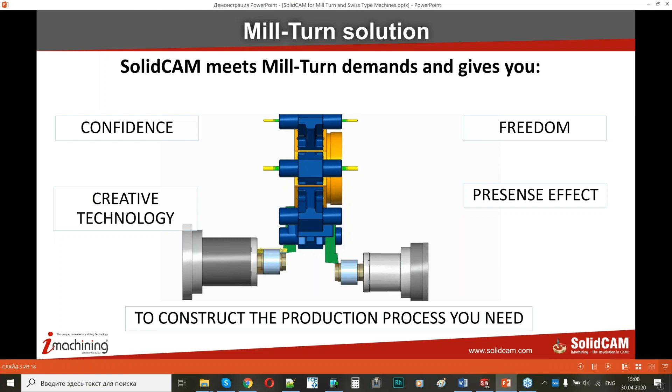Aside from machine architecture, we need confidence to achieve the best results in programming, verification of the toolpath, checking collisions, toolpath optimization, quick part running, exploiting your machine to capacity, and turnaround time. SolidCAM meets Mill-Turn demands and gives you the confidence and freedom in programming, creative technology that lets you construct the production process that you need.

One of the most advanced SolidCAM techniques is the machine preview functionality that I will show today. Machine preview means that the machine can be checked at every stage of the program process. It is not a simulation mode. It takes into account all the input data that you give to the project. Each CAM tree operation and setup has a machine preview window and machine preview functionality, getting live feedback from the machine with this function.

Another very interesting feature inside the software is tool mounting. Tool mounting is a special interface to position tools inside the machine. You can review all the tool posts that it has, and you can position your tools exactly as on a real machine. The user can get valuable information about safety, tool overhang, turret gantry, and any type of tool post loading before the real machine setup.

One more feature is MCO. MCO was designed to operate a machine outside of the cutting process. It is a critical operation for all multi-channel and multitasking machines. There are a lot of steps the user can program with MCO operations. You can change your tools outside of the cutting process, move machine parts, transfer stock, clamp and unclamp fixtures, program bar feeder, coolant, air, and whatever extra functions the machine has.

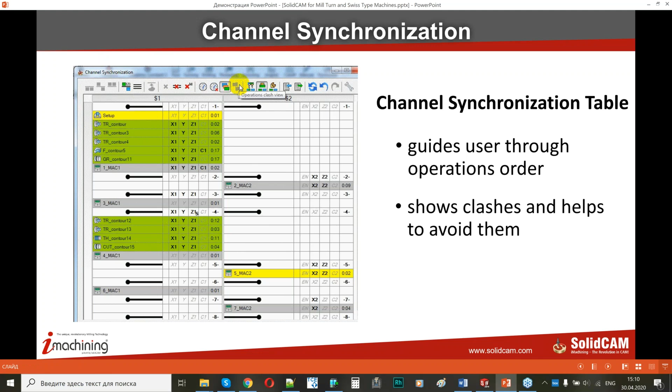Okay, this is the last slide of the first part, Mill-Turn. So in summary, SolidCAM has a flexible structure to support any amount of channels, machine functions, and cutting modes.

Okay, now I'm ready to start the project creation, and I would like to show you a CAM part creation inside SolidCAM. I will go to the SolidWorks environment, and I would like to make a quick review of the first part, which we're going to program today. We will have two of them, one for the Mill-Turn and one for the Swiss type machine. By the way, we will have 3 machines today.

Okay, our part has a 58 millimeter diameter and is 70 millimeters long. I will need both channels, main and back spindle, to program it. Also, you can see that this part has all types of common milling elements - the axial elements, radial, and even elements that will need the B-axis. By the way, my machine has a B-axis only for the back spindle, so we will leave these elements for the back spindle, and I'm going to start from this side of the part.

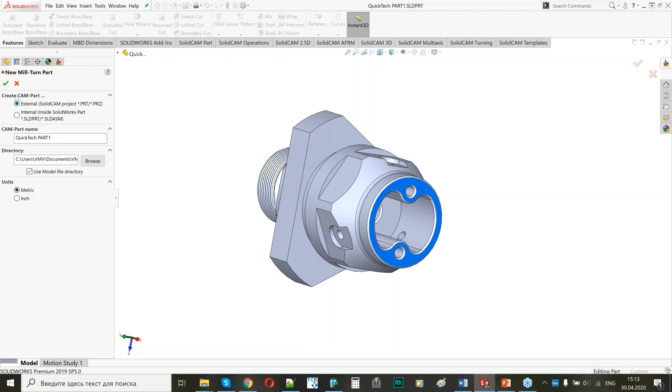And the second preparation step is similar to the steps on a workshop. I should choose the machine. As you can see, today we will use 3 machines. I will start from the QuickTech machine. Later, we will make a quick review of it. So I'll choose it.

And then I should choose where my G54 position should be, the part zero coordinate. Because of the pre-settings of the project, I have a possibility to make the number of clicks less. If I choose the position of the coordinate system for the main spindle, my system, SolidCAM, will automatically create the coordinate system for the back spindle. I just apply the position of MAC1, this is how we call the coordinate system for the main spindle, and the system will automatically create the position for the back spindle.

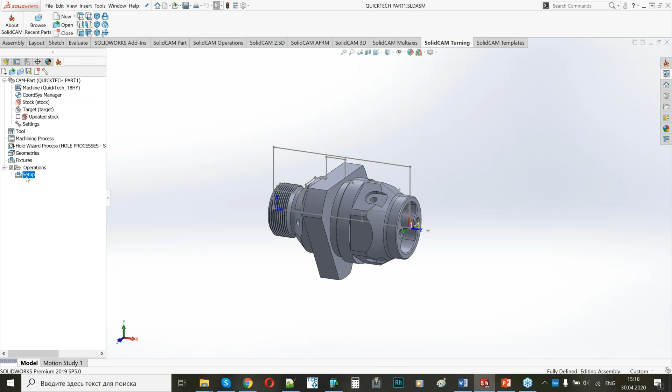The next step for me will be choosing the G54 position. For this purpose, I have a special setup window - we call it machine setup. And this is the first function that I described during the presentation, and we call it machine preview. So this is the possibility to get information about my machine and the position of the stock inside it.

So I would like to input the distance between the stock face and the face of the collet. As the part is 70 millimeters long, and I'm going to cut it from a bar, and I have elements here, I would like to put it 78 millimeters out from my collet. I can see this distance using the machine setup window. Also, I would like to add information for the machine right now about the clamping position for the back spindle, because during the cutting of this part, I would like to do the cutoff when it is clamped in both spindles with spindle synchronization function, which is supported for this machine, before parts are transferred to the second channel.

We can make a quick review of the machine before I add information for the back spindle. This is a two-channel machine. It can supply both with Mitsubishi and Fanuc CNC. The current one will use Mitsubishi.

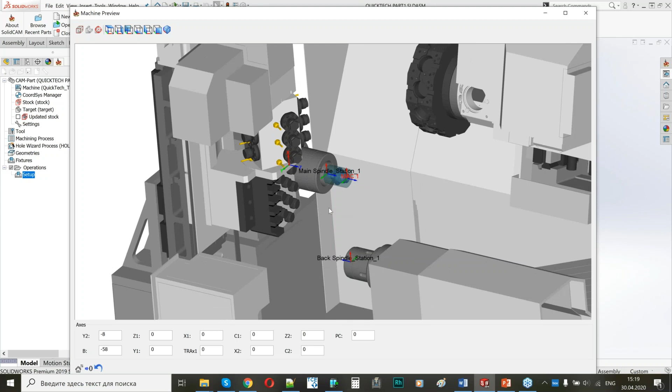My gantry is programmed in the second channel, and it can operate only on the back spindle. This is how the machine is operated. I have several axes here, linear and C axis on both spindles, and 3 rotary axes, C axis and B axis.

I will continue with positioning my stock, because the machine should know where the clamping is going to be when I do the cutoff operation. So I'll click on the position of the stock on the back spindle, apply the stock-in command, and now I can see my back spindle, and I can arrange the position of the stock inside the back spindle after the part is cut off.

This is it, I can change it. I can go back, even though the geometry is created and all operations were calculated. I can go back and change these figures, and the system will recalculate the whole project.

I will put my stock back to the main spindle, because I would like to start from the main spindle. I have my bar here and a bar feeder, and I will use it for the cycle machining. Okay, I finished with my machine setup.

Now the machine and project know where my G54 position is. Automatically, the G55 position will be applied here for the back spindle for the second program.

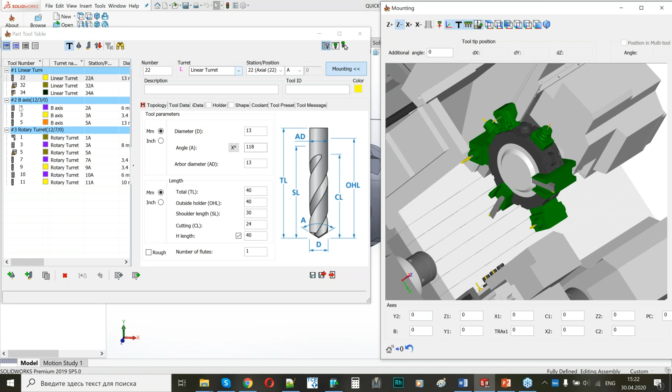And here I will apply some tools on a turret. This turret, of course, is a turret with driving tools also. I have a list of tools on a rotary turret, and I will apply several tools on a gantry.

I have tools for the turning operations. These blocks support only internal turning and drilling operations in turn mode, and this block can be positioned in B-axis. It is driving tools, and they will need a driving C-axis and milling mode on a mill-turn machine.

So here are my tools. I will save this tool table, and now I can start to program.

Now I can start to create my operations. Of course, as always, we are starting from the facing operations. I will go to turning operations. I will name my operation face on main spindle, and I need chains.

I need to input information to the project about what chains I'm going to cut. I have 2 types of geometry here: wireframe geometry - as you can see, SolidCAM automatically created a wireframe sketch based on revolution faces of the part - and also I can use a solid method, which I'm going to show you today.

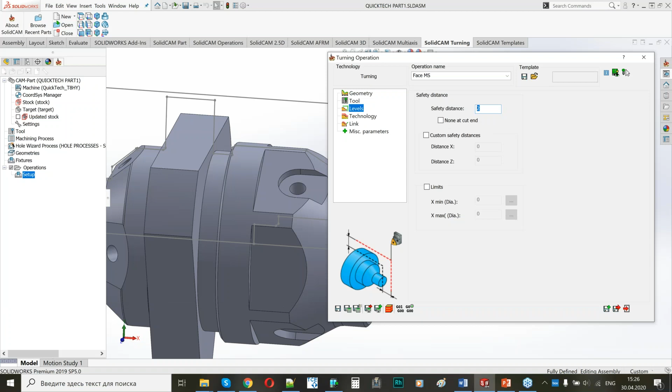I can change and apply different types of safety levels. You can play with these figures during the part creation. And that's all I need for the first facing operation.

Next operation will be OD turning operation. I will turn this part, prepare it for the milling operations. For this, I'm just making a copy of the current operation, because I will use the same tool, but I will just change the geometry.

I will choose what I'm gonna cut, all steps and all chains. This is a confusing moment, but don't worry, we have a possibility to skip this undercut, and I can choose it freely.

That's what I need. This is my chain. I will apply it. The tool is saved from the previous operation. It is still tool number 5.

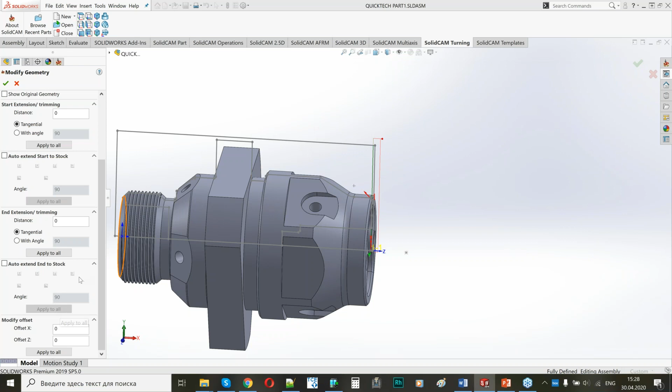...to make the cutting easier for the rest operations, which I will create later. I would like to extend my chain a little bit, for example to 2 millimeters. I will have this extension here.

Okay, now I need to check the strategy type. I would like to not perform descent motions, because I'm gonna cut this groove separately with a separate type of tool, a grooving tool. So now I can perform a calculation.

And this is my standard turning. Very nice. What else can I do? I can perform some types of links. For example, I can put the optimal from previous or whatever you like.

Because these two operations are performed with one tool, they are cut with one tool. This is why we can play with links a little bit more to achieve more optimization of the toolpaths.

The next step is the grooving operation. I would like to prepare my part before I start the milling operations, and I will apply some grooving. So I'm going back to turning operations and choose grooving type, grooving strategy type.

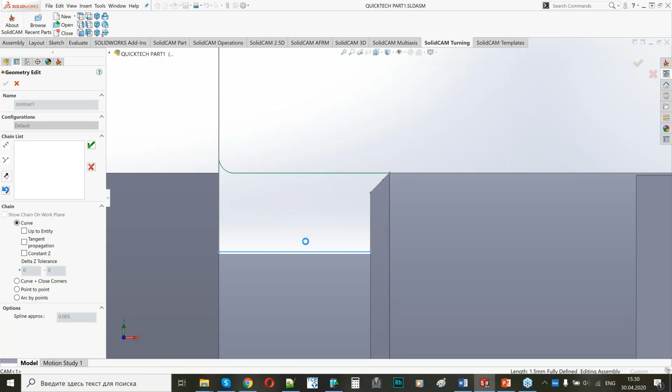And now I will apply my grooving tool here. I will choose it from the list.

And now I need to apply some type of strategy here. We have different types of strategies. It is automatically using the external grooving type. Here I can put information about the steps which I'm gonna use and the step over, so it's a distance in the direction.

Also, if I would like to leave some extra material after the rough operation for the finish operation, if my insert can perform the turning type of movement, or I should divide my groove into stages, first just roughing and then finishing, or whatever you prefer. You can have all these types of strategies inside the SolidCAM software.

Especially, I would like to draw your attention to the types of strategies for finishing. We have different methods. You can apply different types of method according to the functions of your insert. So I will use down only type of strategy, and...

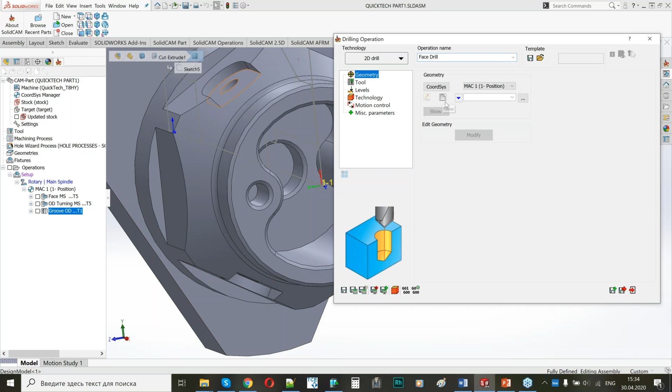So I will add a drilling operation. I will call it face drill. And now I will choose the geometry. I will choose the 0, 0 position here.

And now I can choose my tool. It will be a 10 millimeter drill. I have it here, 10 millimeter drill. And now I should tell the system about the depths of drilling. I will start from 0 level, and go till this bottom. And maybe a little bit further because I have a conical tip, and it will be easier for the machine to have it.

Type of drill cycle, you can choose whatever your machine has. Some mill-turn machines don't have a G81 cycle, and you can use G83 with one step, which will be equal to the finish position, or you can uncheck use cycle, and in this case you will get the code without cycles at all, just G0 and G1 movements code. So this is it. I will apply a one-step cycle here.

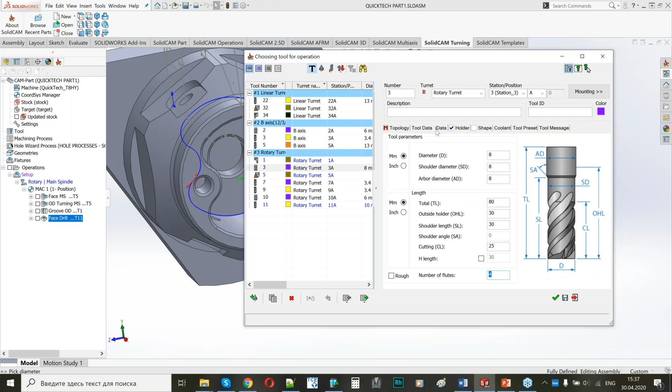Now I will choose my tool. Of course, it's a special tool for the iMachining. It has a special geometry, so I will choose it. It is 8 mm diameter, has 4 flutes, and there is a special tab which is called iData.

And I'm going to apply it on this machine. Okay, here is my levels. They look okay because this is the depth of the pocket.

Inside the technology wizard, put the level of cutting to 2 because it is not the milling machine. We have our driving unit on a turret, and it is weaker than the drive unit on a milling machine, but it can deal with mills with small diameters, for example 5, 8, 10, 11, 12. It's okay for the machine, but if you try to apply a larger diameter tool, you may have problems because the machine can be overloaded in this case.

So I will apply the second level for this part, for this geometry, and also I would like to apply some offset. I will leave some material, and cut it after the roughing operation. I forgot to name my operation as iMachining roughing face.

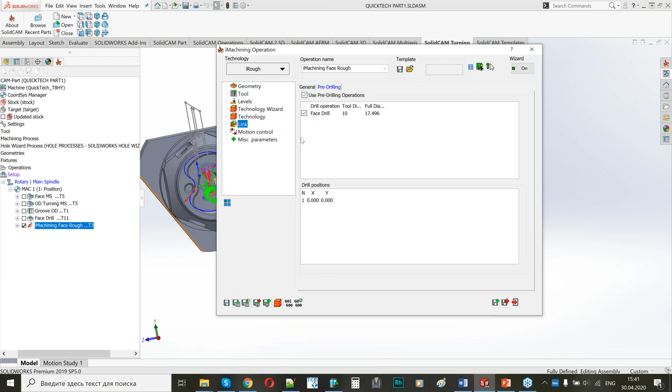My operation will use the pre-drill point. Because I had a tool with a conical part, to not damage the mill, iMachining will make some helical movements at the bottom, and only after that I will have my iMachining toolpath here.

Now I will make a copy of this operation, because I would like to perform an iMachining face finish operation, using the same geometry. I would just put it like a finish operation, using the same geometry, same tool, same levels.

Because I don't have too much material on the walls, I will increase my machining level. Also I would like to get rid of the offsets. I will untick them, so I will get the true results without any extra material here.

What else can I do? I can see the previous operation, which will be taken into account during the iMachining finish operation. So this is the operation which I had previously.

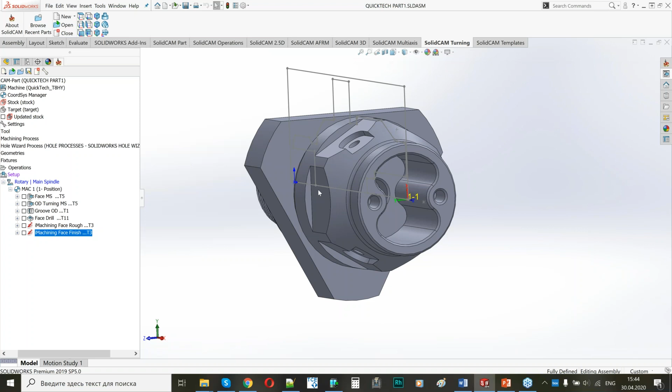I will choose the milling block again, but I will apply the drilling type. Let me check the diameter of the holes. It's 3.4. I need to check if I have the tool for this.

To choose these holes, all I need is to click on a face, and I will have the list of the holes here. I will apply that and we'll see what will happen.

Here I will choose my drill, if I have it. Yes, I have it. Let me check if it's mounted on the face. No, it's mounted radially, and this one is mounted as a face tool. I will apply it, and here I should choose the levels.

Just clicking on the model to get the result. Also I can apply some step here. This is for the G83 cycle, 2 or 3 maybe, I don't know, it depends on the tool. I will have 2 steps.

I can also apply a polar type of coordinates to rotate the part and change the Z-axis, to not move my turret in the Y direction. And here are my drilling operations. Now I would like to mill these faces.

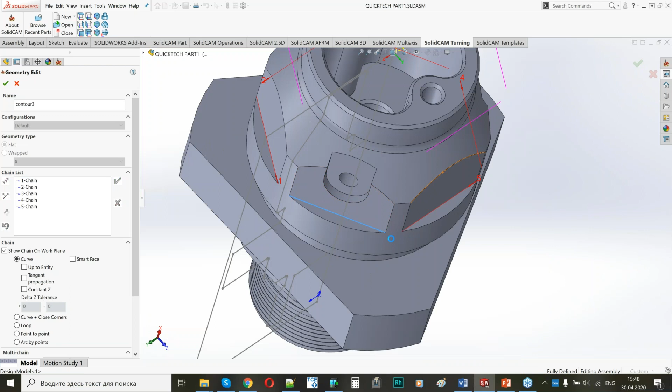Okay, my chains are ready. Now I will choose my tool, it will be an 8mm tool. Here it is. Okay, let me order it a little bit.

Now I should choose my levels. I can apply levels from 0, or, because all these areas are cut already with turning tools, I can apply it like 8mm, and here I will choose the end of the milling operation, the lower level.

Now I have to check the position of the cutter. Also I can do some extension here. This menu is similar to the turning menu. I can also apply extensions on the link page.

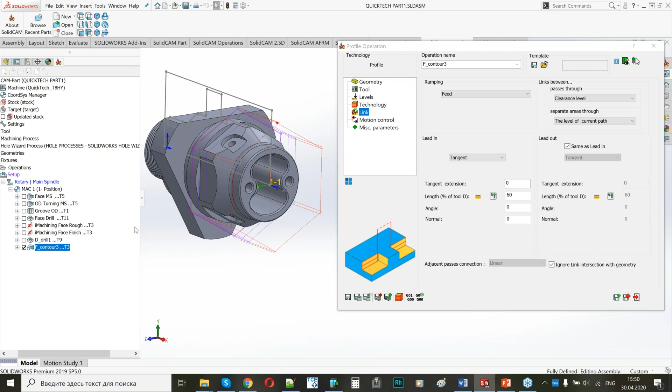So this is my toolpath, and what I can do also, I can leave my tool on the level of the current toolpath to minimize the number of retracts. And also I will give a nice name to this operation.

Okay, the next operation will be some radial milling. I would like to cut these areas, I have several here. On these areas I will show you the transformation functionality of the system, because you have three elements which are the same, will use the same tool, the same toolpaths, the same feeds and speeds. I will cut one and then make a transformation. It's like a pattern, like copy with the four axes.

So for this operation, I will apply a profile type of strategy tool. I will call it radial profile, and I will need to orient, to apply some orientation for my cutter, because I would like to apply some radial tools. For this purpose, I will need some additional coordinate system which will not influence the output. It doesn't mean that the system will create one more G55, G54 coordinate system. No, this is an additional coordinate system only to position the axis of the tool. So now...

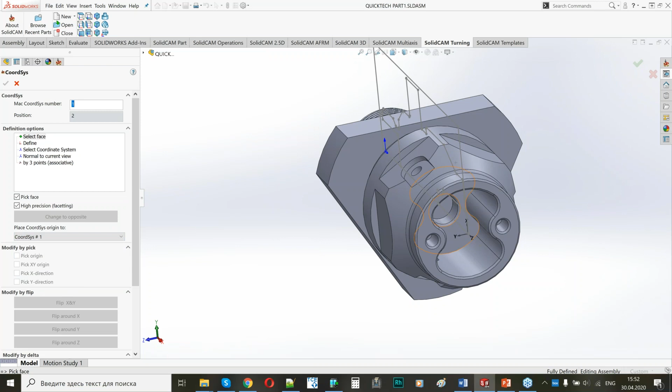I will click on the coordinate system button, and I will add one more coordinate system to my main spindle. I will choose a special function here. This function is used to position the coordinate systems. I have no idea about the real angle between the previous position and current position. I just click on a face and I will get the right direction for tool axis. So we do need to align the tool axis properly according to the surface of the part.

Apply that. And now I can choose the new geometry, new chain. It will be just the geometry of the current profile.

Okay, and now I will apply my first radial tool. It will be tool number 10, which is 6 mm diameter mill. And on the levels page, I will apply the level which is already cut on the previous operation and the current level of the chain. Also here, I should check the direction, position of the tool according to chain. It is okay now. Looks good. And now I can check what I have here.

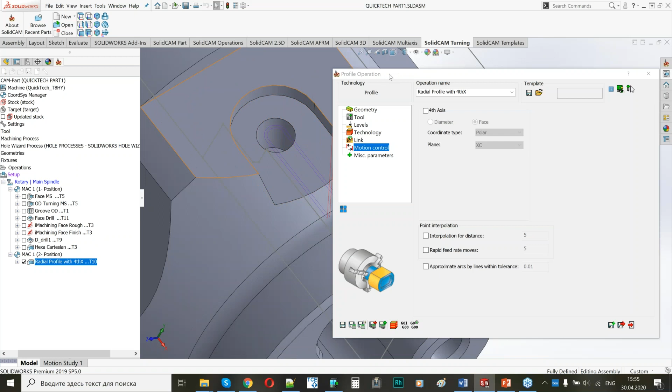I have three elements, 120 degrees between them, and I will click on the transformation button. This is my operation name, the operation which I'm going to copy, and I will use the type of copying the 4-axis. I will include the original operation. The angle will be 120, and I will insert 2 more steps here.

And I can see, before I click apply, I can see my operations, my chains here, just to check if the angle was right, if the angle was okay. I just save that. That's all I need, no more calculations here. It is calculated automatically with the system, and I have my toolpath.

So one more element which I have here is my holes. I will create them with the same manner. I will apply the milling type of operation, will apply drilling. I still have the direction of the tool as MAC 1, 2. This is the right direction which I need.

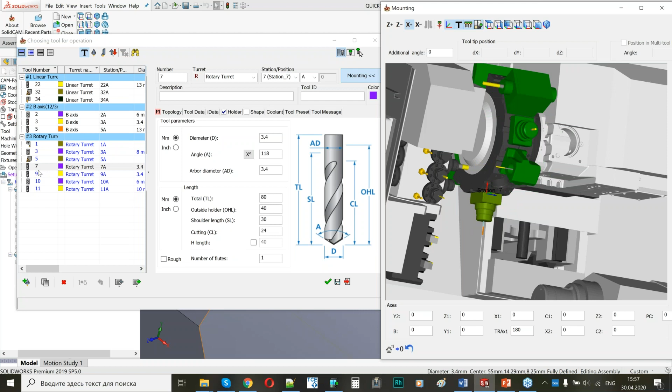Let me check again the position of my tool here. I will use the tool mounting window to check. Yes, this is what I need, because I have 2 drills with the same diameter here, and I don't remember the exact numbers, exact position in the turret. The tool mounting window really helps me with this. So I know that this tool has a radial direction.

Nice. Now I will apply my levels here. For example, I will apply a little bit further, like 2 millimeters. And what I need also is to define the drilling cycle. That's all for the first drill. I will call it radial drill.

Now I have it here, I can see it. I would like to make a transformation again for this operation: include the original, type an angle, add the number of steps. Now I can see their positions, these pink dots here.

So that's all I need for the drilling operation. What else can I do here? I can machine these surfaces. For these surfaces, I can apply the radial iMachining operation again. So I will create, let me calculate it again, go to the milling operation, to the milling iMachining operation.

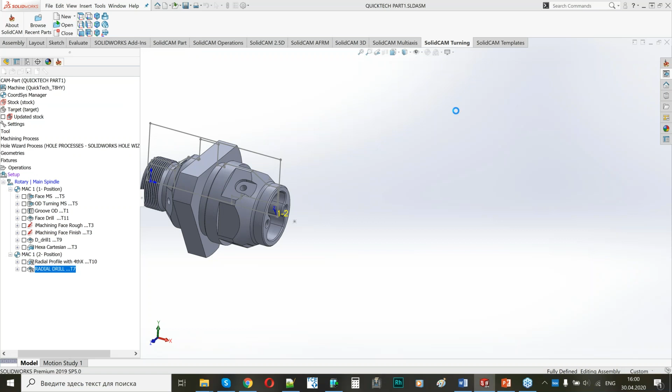Yes, I will need to change my coordinate system first, because this surface is inclined, not like this surface. So I will add one MAC 1 3 position. I will click again on my surface to find out the tool position.

And now I can create my chain. Again, I will just click on a face. I can see my chain, but I know that I can cross these edges with a mill. So I would like to mark open edges here. These edges will be marked as open.

Good. We'll just try to calculate this with the 6mm diameter tool. It's tool number 10, I will check it. Yes, it's a radial milling tool. I can use it.

Also, I need to care about my levels. Here I have the first level, which will be the already cut turning level, and the level of the chain. Now I will try again to calculate it with the second level and what I can have with my tool technology. I think I will try to calculate it.

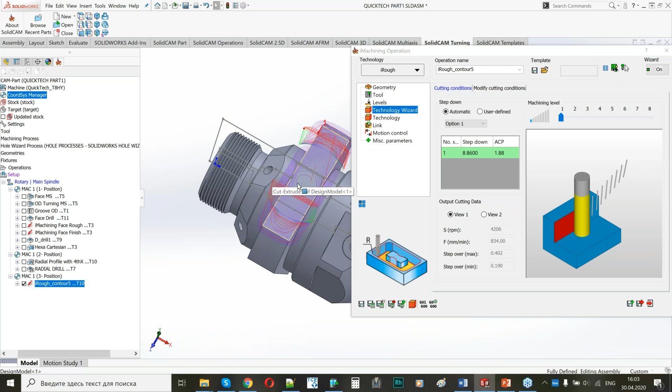Nice, this is my iMachining operation. But I don't like it, it goes further. I need to check my chain here.

Let me check it again, and I will mark my open edges. Okay, just leave it like this.

Now I would like to make a transformation here again. I have the 3 edges, and I will include the original one and make 2 more steps. Apply that.

Okay, so now it is time to perform some part transfer and preparation for the part transfer. For such type of machines, let me open my machine. This is my machine, and what I have here.

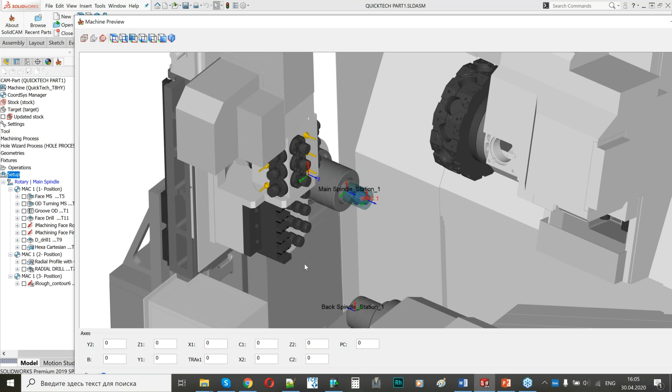After that, I will take my turret, call the tool for the cutoff, tool number 1 I think. Then I will perform the cutoff, and the back spindle should go to its home position by Z direction, and then it should go to my gantry to perform the operations on the back spindle.

I would like to mention that all these operations should be divided on different channels, because I can operate with the turret only in the first channel, and with the back spindle only in the second channel. This is why I will need several additional machine control operations. So this will be the best example of why we need MCO operations and how we can deal with them. Let me show you first the interface of the machine control operations.

I have, after milling and turning operations, here the machine control operation. With this interface, I can choose any device of the machine. For example, I can choose a rotary turret, and I can see all commands which are available for the rotary turret.

Also, it is strongly recommended to use machine preview during all these operations. So I can see my turret, and this is the position of my turret after it was retracted after the last operation. Here, for example, I can perform some movement. I would like my turret to go, let me make it bigger, to go to X, for example, home position. So this is the home position.

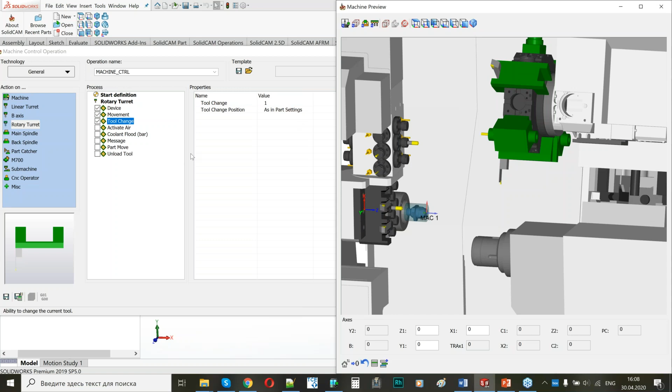This is one side. This is the basic feature, basic tools that we are using to control the machine, control the devices. But if you deal with such type of machines, there are certain rules, a certain routine, for example, the cutoff and part transfer process. And to not create all this process from scratch each time you have a new part, we have the

function which is called MCO cycles. So we have all these stages, all these motions, issues already added for the certain machine. And today we will see a lot of different types of MCOs, and we are creating MCO for the certain post processor. These commands are connected with the machine ID file, and if you transfer the part from one machine to another, you have to care about MCO operations because they will differ, as these processes differ on different machines.

This window was just for demonstration, but I'm gonna use the MCO cycles. So again, I will take machine control operation, but here I have a list of predefined sequence of cycles, and all I need to do is just input the parameters that may be changing during this process. For example, the first MCO operation will be on the first channel.

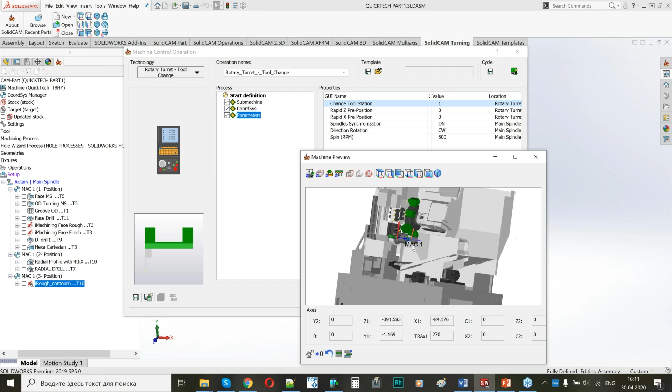Also, as you can see on this machine, if you're using it as an operator, and I click on the front view, you can see that this gantry completely closes the view of the turret, and you have to move inside the machine to see what's going on there. This is true for this machine, which is why we recommend using the machine simulation and 3D of the machine. It's a good example of why we need the 3D machine view, because we don't need to go into the machine and put our head inside it.

You can use only the machine preview window for this purpose. So I have the preposition for the tools. I will put my tool to the safety position, or for example, I can set some figures here, and for example, I would like to move my cutoff tool only in the X direction. I don't want to move it in the Z direction, for example.

Here I should decide if I will use spindle synchronization. It is always recommended for this machine to use it. And this is the direction of rotation during the spindle synchronization. There is a special technique for this machine: on the first step you apply a lower speed, and during the cutoff, you apply the cutoff speed.

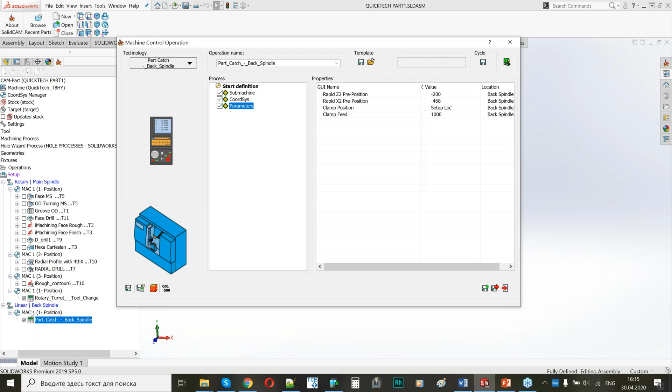So what I have here, let's take a look. I will just calculate that. So here I have information about the submachine, and this is also information about the apply channel.

I will preposition my z-axis, so this is like the safety position for the z-axis. Then I will preposition my x-axis, so the default position for the x-axis is the position near the gantry. It should go to the main spindle to make a part transfer. Then I will go and apply a setup location, which I added previously in the setup window.

I will also input the clamping feed. During this process, I'm not going to use millimeter per revolution, I should use millimeter per minute, so G98.

We have this information inside the post processor, and you can input the speed of back spindle movement during the synchronization. I will remind you that this process proceeds during the rotation of main and sub spindle - they rotate together with the speed which we added at the previous operation. So I will apply this.

And now, after the back spindle was clamped, I can apply a cutoff operation. I will add turning operation, and we have a cutoff operation here. I will name it as cutoff.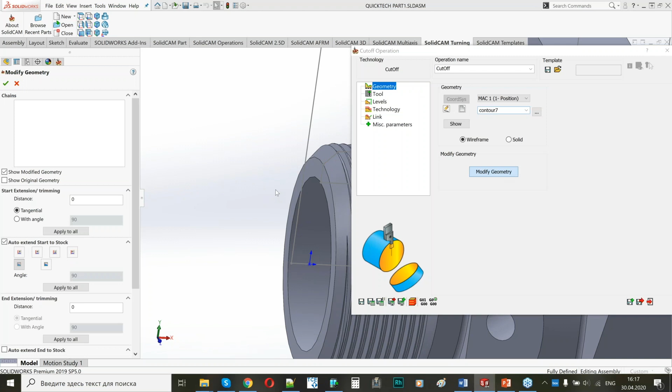Here I can leave some allowance, for example for the turning operation. I should choose my geometry here. I will choose this one. We'll change the chain direction. Now I will modify my geometry a little bit to have the cutoff operation from the bar diameter until the bar end.

Now I will again choose the cutoff tool, tool number 1. I will leave my levels, and I should put some offset here - this is offset for the back spindle facing operation. Here it is recommended to put only the X value, so I will put some safety value, and this will be the same value for retract.

So this is my cutoff operation. Now I need to take the stock and put it with the back spindle to the gantry. So now I should perform the movement of the back spindle, and for this purpose I will go to MCO cycle again, and choose a part transfer back spindle operation.

I have the message again because my channel will be changed. The back spindle is programmed in the second channel, and I don't need parameters here because it is known that the back spindle will go to its Z home position, Z2 home position, and X2 home position. I will just calculate that. It is supported with a certain code, and the code will be outputted to the program after the end.

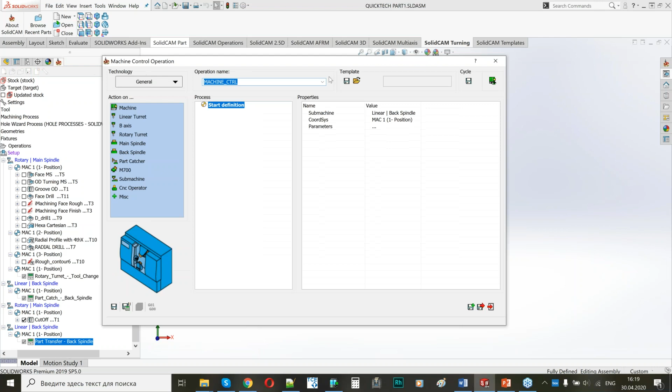The next step here is to prepare my turret. For example, I don't want to leave my turret with this tool, I would like to move it somewhere, for safety reasons. We have this cycle, you can apply it or not apply it - it depends on the workflow you prefer on the machine, because all these menus are completely customizable.

So I will apply rotary turret tool change end, and I can choose the next tool, for example, which will be used for the first operation on the main spindle again when I will launch the cycle. It may be T5, for example, or I can leave the cutoff tool here.

Okay, now I would like to add operations for the back spindle. I'm ready to do this because I have my stock inside the back spindle. So I will go first, of course, again to facing operation. I will name it as face turning on the back spindle.

And here I will apply MAC 2 coordinate system. I will choose the geometry - this coordinate system became active, I can see it here. And I would like to do just a simple turning from upper level to down, modify geometry again, because I have laws here.

Extend it. And now I have a possibility to choose my tool - this will be the tool on the gantry.

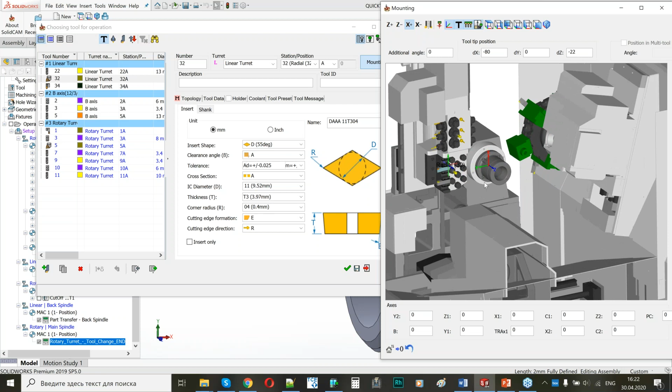Even this coordinate system for the turret is rotated. This is why we need powerful tools inside SolidCAM to deal with these machines. But we can do this easily because of the features we have here: machine ID, post-processor, and machine file, 3D of machine. We can do this, and we do this.

So I choose the tool, my tool. I can leave these levels and I will leave this geometry as finish only. And what I can do, I think I should change my approach because now I will use the right side, I used left at the previous. Okay, this is my facing operation. If I don't like it, for example, I can do it with X direction only. In some cases it is better to use just Z direction. No, not good idea. Okay.

I should also change the setup settings because I forgot to put MAC 2 coordinate system here. And from the right. Okay. I will delete it and try again.

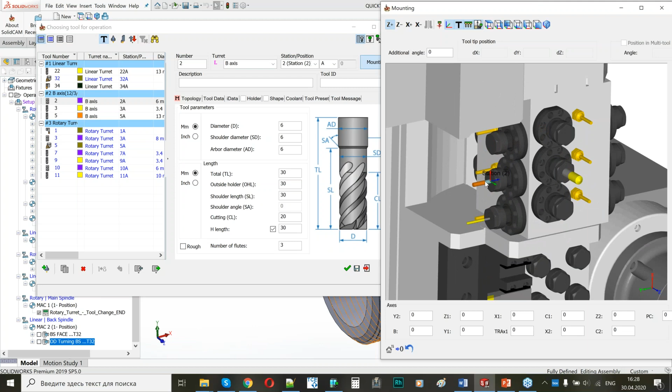Here it is. I'm going to rotate this station to the part. And I will choose my levels, for example from here to here. We'll check that. And I will use technology with classical spacing, equal step, and I will need to check my extensions, and I will use some angle here.

I will try this. And also I would like to use some corner radiuses for this operation. And also I will need to extend my lead-in here. So let's calculate and check what's going on here.

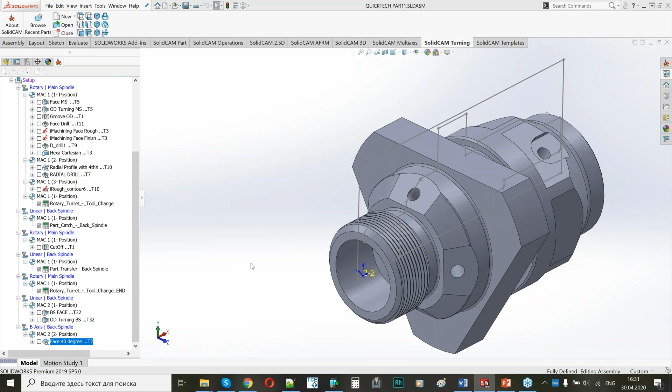Okay, and I think the last operation will be a drilling operation here. I will go again to milling operations, go into drilling. I'm going to use the MAC 2 and second position of the MAC 2 again. I will just click on the surface and the system will find the zero position here. And I will use my tool, it will be a tool on the B station. Okay, and I should check my levels here.

Nice, and here I have the functions to deal with the 5-axis machine. To understand if I will need the first or second angle pair, I will launch the machine simulation, and then I will be able to answer this question. Okay, and now I'll do the transformation again.

Okay, 90 degrees and 3 steps here. Of course I can add more operations here, but they will be done in the same manner as on a main spindle. I can also add some drilling and milling operations on the face, add threading operations, but we have one more project today.

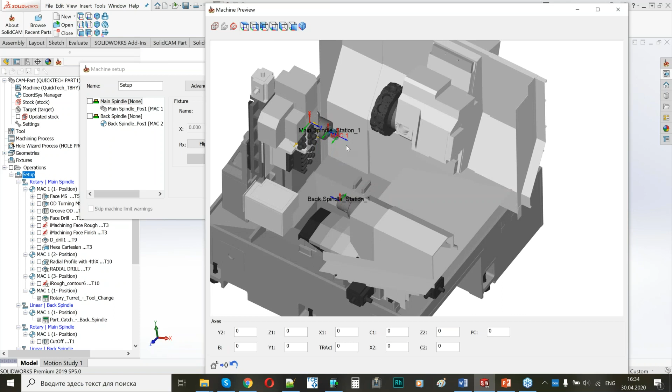Spindle goes here, catcher opens, and spindle is unclamping, and there is a pusher inside which pushes the part here, and then it goes back, and the conveyor for the parts comes on, and then you will get the ready parts out of the machine, and in this time the machine is ready to cut a new part.

So this is a very important thing. The machine should know the moment when it should drop the part.

Now let's go to the channel synchronization table. Let's take a look at this functionality. So this is the list of all operations which I added today to this project. And here we have some buttons to manage these operations, their position, and the wait marks.

These black lines mean the wait marks. So according to this, it's a special command for this machine, it's an L command. On the next machine with Fanuc, it will be an M command. And this command appears in both channels because this machine needs two programs.

So you will have two files loaded, one for the first channel and one for the second channel. And the link between these files is the wait marks. When the wait mark with a special number appears in one channel, it will wait until the same mark appears in the second channel. And we have some tools to manage all this.

For example, my favorite tool is Synchronize All Operations. And now I have the wait marks that I need. For this operation, for this machine, it's quite enough, to be honest.

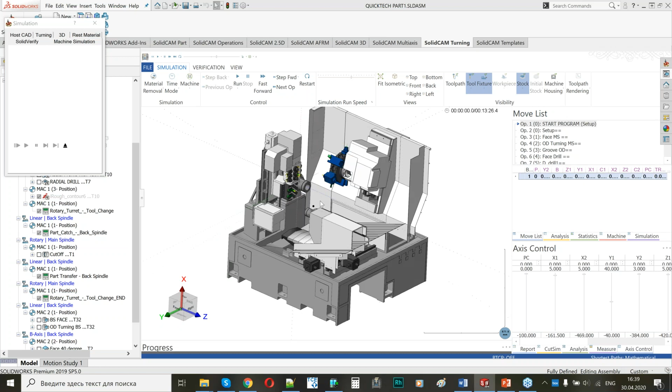It will take time to load a little bit because of online translation, but we are trying to make our STL assemblies as small as possible because of the weight of STLs and the speed of machine simulation, and its influence on the simulation. So here I have the list of my operations. I can go to any operation I'd like, and I hope the speed is okay now, maybe a little bit faster.

So this is what I have here. I'll go back to my cutoff operation and show you what's going on. This is my first MCO operation. I put my turret to the safety position and change my tool. Now I'm waiting for my back spindle here, and now I can perform the cutoff.

I can see now, for example, I would like to put my cutoff tool further, to the X position, or maybe safety home position X. And now I can have my turning operation here and other types of operations on the back spindle, make the speed lower. This is my first B-axis operation, and the angle pair looks okay.

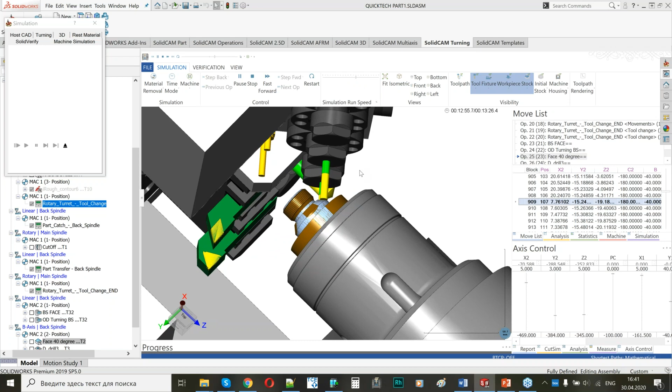This is milling. So this is how the movement is performed. We have the Y movement of the gantry, and Z, X and C movement on the back spindle. And I had my drill operation here. After the drilling was performed, I put my part to the part catcher. Okay, it looks not bad.

Now I would like to make a synchronization, so both channels will work together. I'm going back to the channel synchronization table, and I should put the command add new workpiece. That means when I cut the back face on the back spindle, a new part will come here and the cycle will start. So I will add a new workpiece, get rid of this label, and synchronize this, and also put the wait marks somewhere.

For example, I would like to synchronize milling operations or whatever I like. For this machine, it will be enough. For a Swiss type machine, maybe you will need more clicks. So I will go to simulation again, machine simulation.

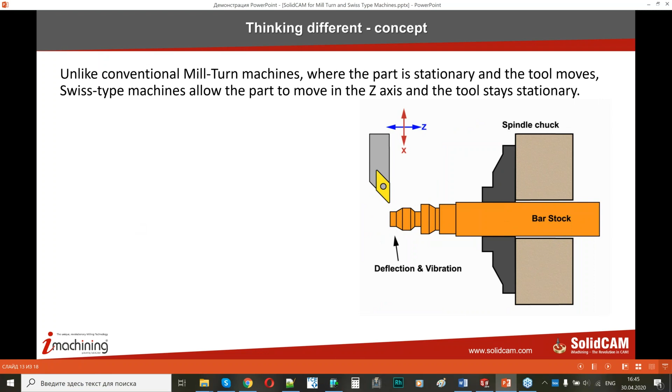So here on the screen, you can see the type of motion we have on a mill-turn machine. The bar, our stock, is fixed in a collet, in a chuck and fixture, which we have on a mill-turn machine. Because of its diameter and length, we have some vibrations and problems during the cutting of special types of parts, especially small parts. But for the Swiss type machine, this is the main difference.

We have our stock movement, so the tool is always near the fixing zone, near this device, which is called a guide bush, and we have more rigid cutting, less vibrations. But because of this, we have a special set of rules we should satisfy when dealing with these machines.

So this is the construction we may have, and this is the rigid construction for the cutoff process. Here we can have our back spindle, which is clamped, as you saw, and we are going to use this on the next project. We will clamp our part and describe this process in the machine setup window. We have our guide bush.

It is not moving. It is used only to support the bar, and there is a certain place for the tools. Tools don't move in that direction, they only move in the X and Y direction, and this is the device to clamp and move the bar stock. This is the main spindle, back spindle, and guide bush. This is the construction that we have in Swiss type machines.

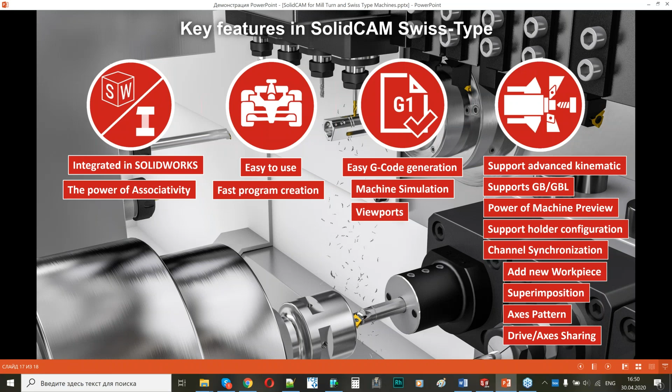This is the machine which will be used today for the last part. Now I will go back to my project.

I'm going to open a new part here. It will be a part especially for the Swiss type machine. Let me take it. So it will be the Jinfa part.

So what do we know about this part? It is small - the maximum diameter is 16 millimeters and the minimum diameter is only 5 millimeters. It is not really long, only 13 millimeters long.

For this part I'm going to use the same workflow. I will click on new mill-turn and apply the machine called Jinfa. I will show you how this machine works and the devices it consists of. I'll choose this Jinfa machine, then convert this project to the Citizen machine - the same process as during the mill-turn. I will choose the coordinate system.

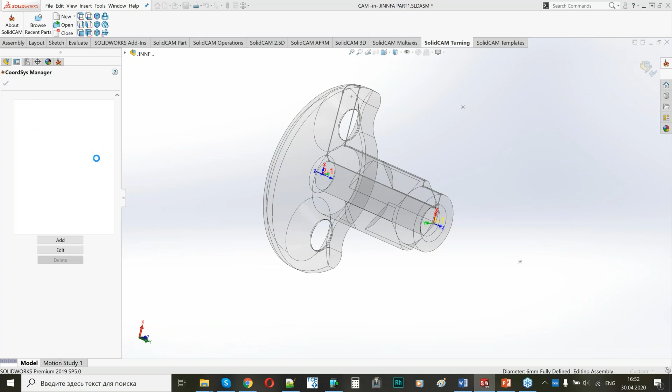Here I have my stock. I will give just 1 millimeter more for the outer diameter. Here I have 0.5 millimeter on the main face for the main spindle and 2 millimeters on the back face.

Now I will go again to my setup, the machine setup window. This setup window will differ from the mill-turn machines because I will need more information to machine - I will need to give the numbers for the working lengths.

So here I can see my machine, by the way. I have several turrets here. This is the holder for OD turning tools. This is the non-driving holder for internal turning and drilling, turn-drill operation. This is radial milling tools and axial milling tools. Here I have a special tool table, the attachment for the outer diameter tools, and tools which can be used as milling and also as turning, depending on the holder attached here.

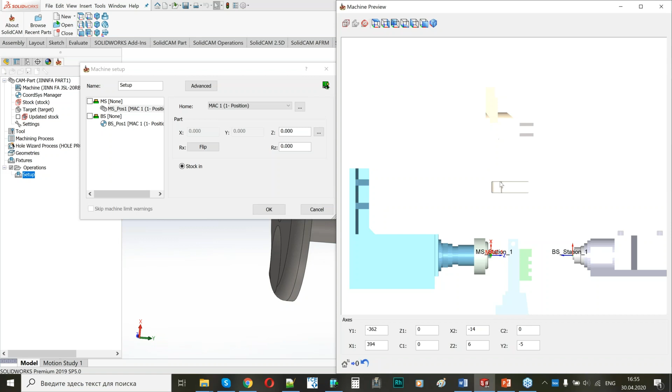Also, I will add the allowance for the backface separation and some safety distance. For this machine, I will apply 35 millimeters. This is more than the length of the part, and on this machine simulation, you can see that the part is moved out of the guide bush, but in fact, during this process, it will be unclamped inside the main spindle. For the back spindle, I will not forget to put the MAC 2.

Also, I will need to add information for the clamping process. I will put stock to the back spindle and check what distance will be preferred for this tool. For example, I will apply 4 millimeters. This will be my clamping distance for the part. I will put my stock back to the main spindle, and now I'm ready to add my tools.

I will show you how to add tools to the tool tables because I don't have a lot of holders here. So I will start from the cutoff tool. This is a very important tool for the Swiss type machines. All the processes are started and ended on the main spindle with the cutoff tool.

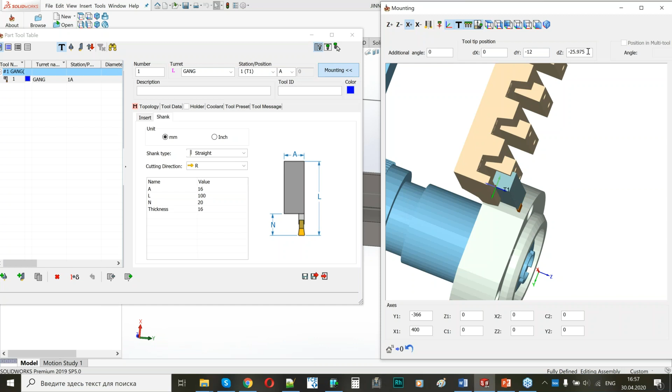I need to put my tool where it should be. It should be moved by Y direction and moved a little bit on Z direction. As you can see, X direction is 0 because there is a preferred distance which is mentioned inside the programming manual for all tools, which is set to the OD turning tool holder. So I will leave it as it is, and this is my gang.

Gang, all these tools are attached to the device which is called gang. Gang on the Swiss type machines moves in X and Y direction on the main spindle, near the first channel near the main spindle. So I will leave it like this.

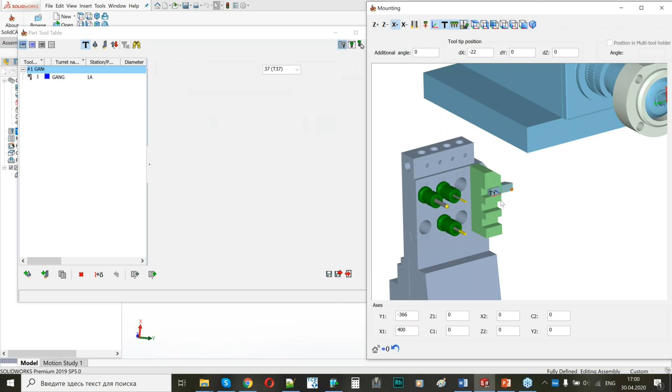So these are my tools now. I will have two OD turning tools, the tool for the cutoff, tool for the external turning. I will have two drills. It will be a turning drilling operation, and I will have the tool for the radial milling. Also, I have some tools for the back spindle: the drilling tool, some center tool, milling tool, and one more OD turning tool here.

Okay, so let's create - I will try to do this quickly. Let's create again, starting from the face operation with the facing tool. For OD turning, I will use MAC 1 position. I will use my geometry. I will go to modify geometry and apply extension again.

It's a common operation which is supported both with mill-turn and turning projects. So here I will choose my tool for OD turning - I have only one here, easy to find. I will leave level as 2 millimeters. That means that my stock will go inside the guide bush collet on 2 millimeters. The tool will not move in Z; only the stock will move in Z on the main spindle. So here I will apply my finish geometry again, and I will leave my links as they are.

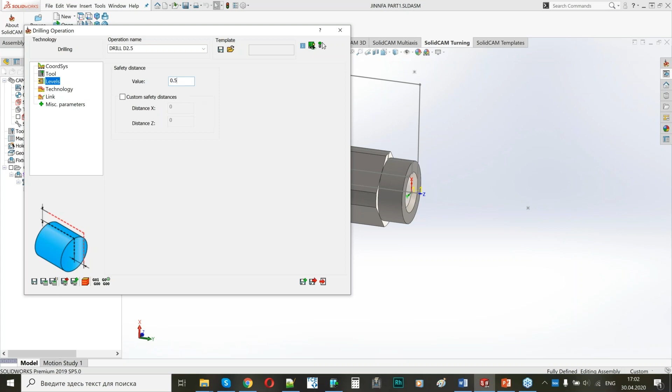Now I would like to leave my level as a 0.5 millimeter. And in the technology, I would like to have my drilling end as a full diameter, here at the back face. Also I will leave some extra, put my drill a little bit further.

As in the previous project, we have a drilling cycle, and here we have only drilling and tap cycle because this machine doesn't have a G81 cycle, and all drilling is performed with G83, G87, or with just G1, G0 mode. So I will choose my drill cycle and add some information.

For example, I will use a 2 millimeter step here. Also, I would like to apply some safety movement in Z, just for example, 2 millimeters here. And now I have my drilling operation.

I will make a copy of this operation and will program the hole chamfer.

I will need the bigger tool. I will use this one, it's the neighbor tool, 6 millimeter center drill. I will leave these levels, but I would like to choose the diameter value parameter, so I will choose the diameter which I would like to achieve during this operation.

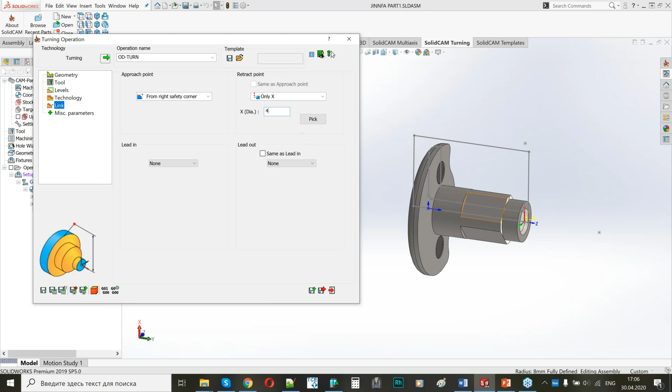So I will put only X movement here, and the part will stay where it is in Z direction. And I will apply that. This is what I have for the rough turning operation.

What else can I do for such type of machines? If you cut hard cut materials, like stainless steel or something like that, there may be a problem during part retracting to the collet. We have a special function here called break material corner on stock, and there will be added a special movement to break extra material so as not to damage the collet.

Okay, I finished with the turning operation, and now I would like to add the radial milling operations. I will go to milling operations and apply profile operation.

I will name it radial milling, and I have to add the coordinate system, a new coordinate system here, again to position my tool and choose the direction of the tool. Here it is. And again, I will just make a transformation with 4-axis to copy this element.

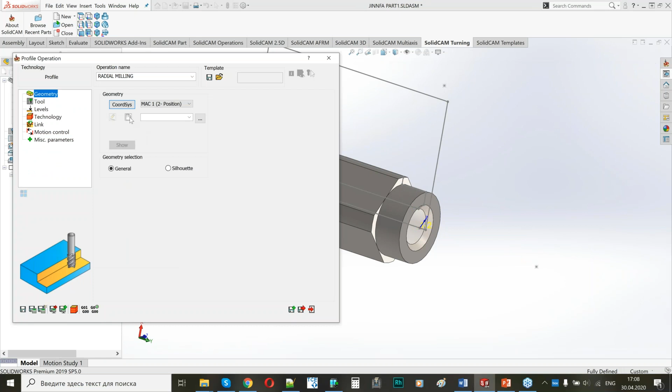Now I'm ready to add my geometry. I will choose this profile.

And I should choose my tool. I have only one radial tool, it's 10 millimeter diameter, located here. As you can see, we applied a special holder for it, which is located in a special tab inside the tool table.

And I should choose my levels here, so I will apply my levels. Just calculate and see what will happen. Okay, I need to change the side of cutting, and also I would like to apply some tangential links here.

This is the simple cut, and I will just apply the transformation again. I have 4 sides, so it will be 90 degree transformation with 3 steps. I can see them and apply it. Good, I have this operation very quickly and very simply, not a lot to do.

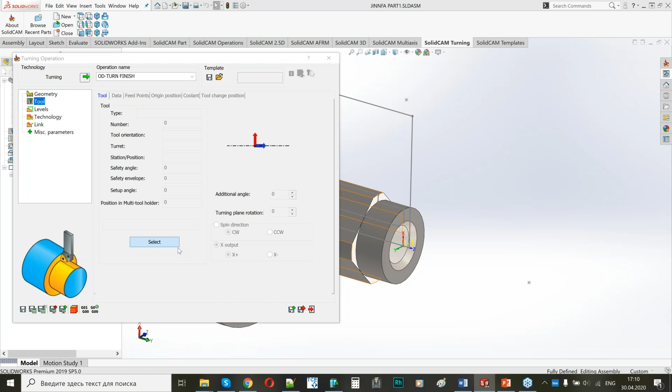I will check later if I will need some extension for this contour, but I will apply my tool number 3 for this. And we'll just apply some finishing operations only. That's all I need.

Okay, this is my operation. Now I'm ready to perform my transferring operation. As I said, each machine has its own routine for the transfer. This one has some different type of transferring from the previous machine.

The first step is what we're calling preposition of Z1. In effect, it's a preparation of the main spindle. What do we have here? First of all, we should...

Choose the cutoff tool. It seems like the same process as for the mill-turn machine, but the cutoff tool for the Swiss type machines is really critical information which goes together with machine parameters and loaded with the G code. And here I can apply the rotation speed.

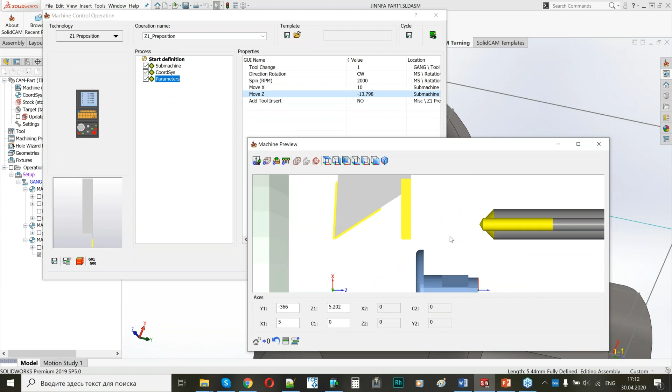And here I can see the position of the tool and position of the part on the machine with a machine preview window. It is very easy to perform these operations with machine simulation.

So the next step will be, for this machine, synchronization of the rotation. So I will add one more machine control operation, and I will choose synchronization, spindle synchronization mode. So this is the speed which will be used for the cutoff operation.

Next step I'm going to use is the position of the back spindle. This is called BS clamp position, and here I should check the clamping position. I will just choose the setup location, and the system will take information from the setup. I don't need to think about it if I applied it inside the setup.

But after the calculation, I would like to check where this position is. I will take the upper view, and here now I can see - this is like a safety position, 5 millimeters before, and setup location exactly that location that I mentioned in the setup window here. So again, calculate.

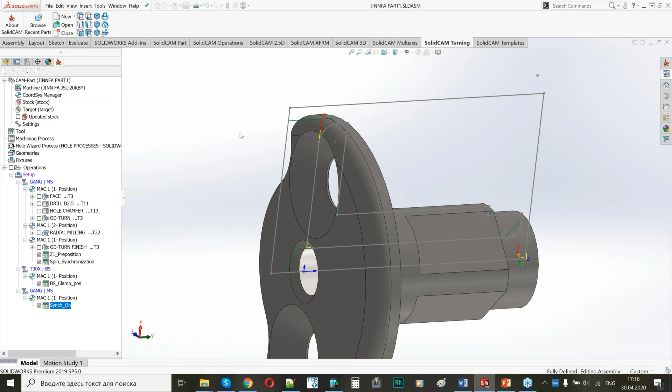I will modify it a little bit at the beginning and at the end. I can do more prolongation if I wish. So it completely depends on your needs, on how you would like to program it and position it.

Now I'm choosing the cutoff tool, tool number 1, and I will leave these levels. And this is my allowance, 1 millimeter, which I like to leave on this face.

What else? It is very important to put the x-axis in the same manner as here, so I will put 20. But for the retract point, I should put none, because on a Swiss type machine, the cutoff tool is left after the cutoff on the bar at the low position, like x-2, and it is normal because from this point, the new loading, new part, new cycle will start on the main spindle.

So I will just calculate that, and I can see my toolpath here.

So then I should turn off the synchronization mode. If also I can have more before cutoff, I can have more operation here - it's a special mode also for long turning, for example. So I will add MCO and I will add synchronization off mode.

And after that, as on the previous machine, I need to take my parts with the back spindle and put it to the second channel. So I will go to the next MCO operation. It will be operation on the second spindle, and it is back spindle home after transfer operation. It doesn't have any additional parameters, but it will output some code to the program, the G code.

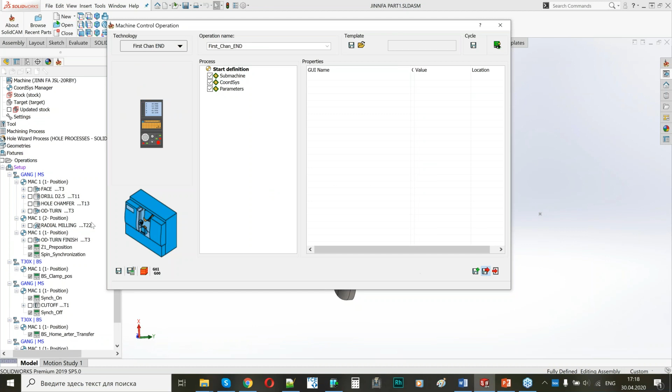And the last one is about the bar feeder. It's end of the first channel. I will change the channel again for this. And that's all I've done with the part transfer.

Now I will add just a couple operations on the back spindle, and we can go to the channel synchronization. I will go again to my facing operation on the back spindle. Hope I will not forget to change my MAC to my coordinate system - it should be the coordinate system for the back spindle.

And now I need to check. I would like to wireframe the geometry because I have a radius here, and I would like to be sure. I will choose it - this is it. And what I'm gonna do here, first of all, I will apply the OD turning tool, which is located on

a station for the back spindle. It is here, I will apply it. And on the levels page, I will leave this. I will again use only finish mode. And let's consider our links, because

now we have Z direction. Z movement is again the movement of the stock, but it is clamped on a back spindle, and I have my tools fixed on a Y2 station. I would like to have more safety distance here, so I will use only Z approach, and it will be quite large.

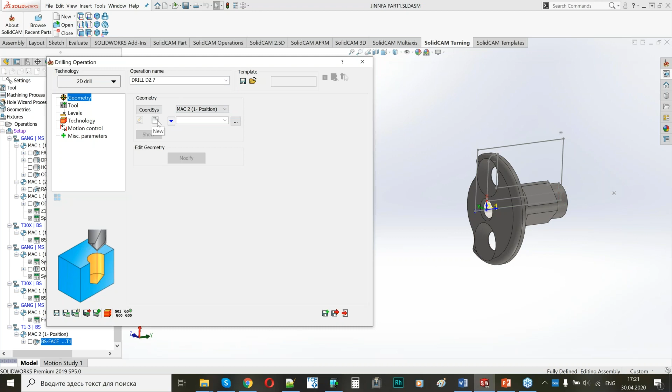So now I will put the information about levels like this, and I would like to put it as a full diameter and like 0.2 millimeters lower than the full diameter. And I will leave it like this and calculate it.

What I want to do here is apply a polar movement. I don't want to move the tool in the y-axis. I would like to move the C-axis. So I will apply it as a polar movement.

The next will be these chamfers. So I will just copy this operation, and we'll add a chamfer here. So I will change my tool. I will use a bigger tool here.

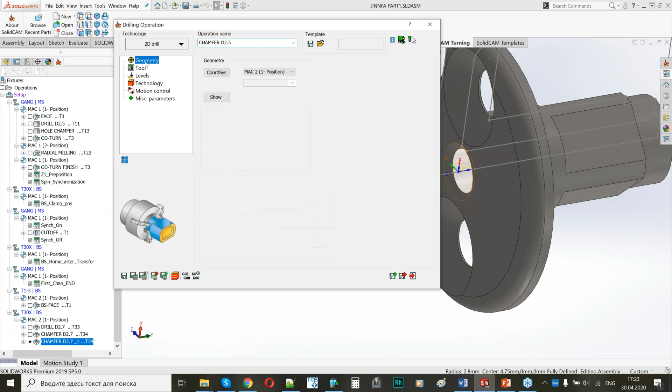So I will go here and just choose my zero position, apply it, and I will leave this tool. I need to change the diameter value here. It is smaller, and it's okay for me.

And the last operation is the milling operation. So I will choose it from the milling operations, and it will be a profile operation. I will call it BS profile, for example. And here I can use this coordinate system, and I would like to choose my geometry.

It has several radiuses, I will choose it like this. Step by step. So I need here I will choose my milling tool on the back spindle.

It will be a 4mm end mill. And I will go to levels and choose them a little bit more for the tool, to be sure that it will cut all the geometry. In the technology page, I would like to check the tool side.

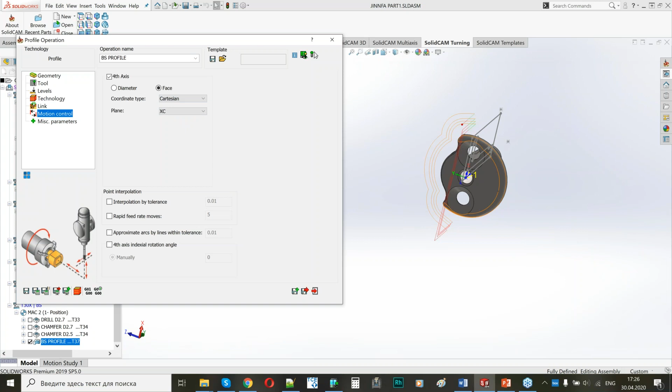Okay, this is what I have for this operation. What else can I do for it? For example, I would like to apply it with the Cartesian coordinates, again using my C-axis. I'm not going to use the Y-axis for this operation. This was the last operation in the tree, and now I can perform the part ejection process.

It is called ejection. I will just apply it, and now I can go to my synchronization table again, and now I will check my process, and I know that here I will need an additional wait mark. It's like a requirement of the machine. Let's check the simulation, maybe this too, and then we can create a cycle process with channel synchronization.

I will go to simulation and machine simulation. Should wait a little bit again. Okay, let's check what's going on the main spindle. We have our turning operation, and the movement is performed with the part, with the bar.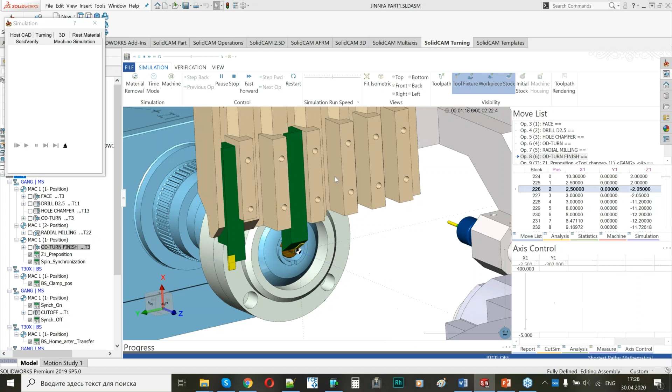This is how milling operation is performed. The stock should go out from the collet, and it goes to the tool. This is my finish cut, and then we will see the cutoff process. So now we have our cutoff process, and the tool and the stock go to the back spindle. That's all, and the machine is ready for the next part.

Again, to perform a synchronization mode, to have the cut in both spindles, I will have to add a new workpiece here, get rid of this wait mark, and also change a little bit. I would like to start these two operations together, but after ejection, I would like to separate it a little bit. I need to add one more wait mark here. It really depends on the machine, the number of wait marks and how this process should be organized.

And now we can check the machine simulation together with two channels. It took just a few clicks to create the program with synchronized cutting in two channels together.

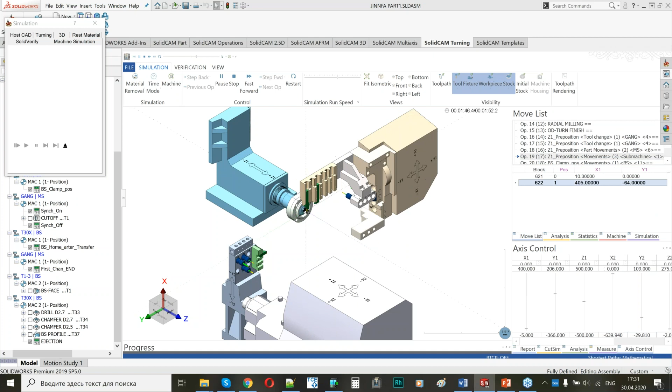Okay, I will try to just run the machine. And now I have all operations together. Of course, operations on the back spindle will be faster, and the back spindle will wait for the wait marks which is on the main spindle to perform the cutoff. This is how it's waiting. Okay, cutoff operation, and that's all.

Okay, and the last subject for today is how to convert this process to some other machine. For example, we will review the Citizen machine, quite popular model. It's the Citizen L32 machine, and you can see now that the number of turrets and the type of turrets differ a little bit from the previous machine. Of course, turrets for the back spindle, you can see them here, are the same.

Also, you can see that the main spindle of this machine is located on the right side. For the previous machine, we saw it was on the left side, and maybe the Z-axis signs will differ, so it will take time to convert this part to some other machine if you're going to do this manually, but I will show you how to do this inside the software, quite easy and fast.

Also, what I want to mention here is we don't have turn drill tools here. We have two turn drilling operations for the Jinnfa machine, but here we don't have this attachment. We have only OD turning, radial milling, and B-axis milling tools. But we have some tools for deep drilling on the back spindle, and I'm going to change the type of operation to put this drilling so it will be performed on the tools on the back spindle. So I'll try to do this quickly.

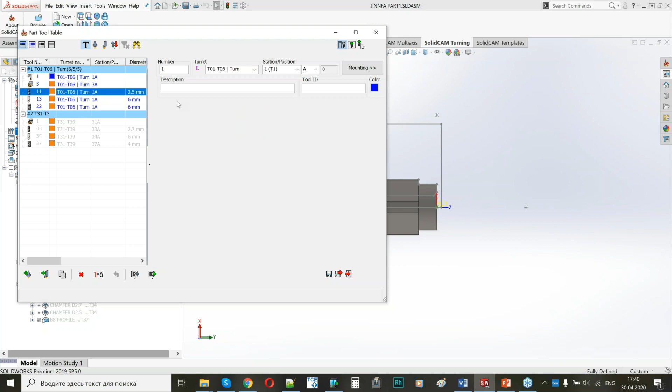Okay, next step is to put my tools into the new positions if needed, because I now have, for example, turning tools and drilling tools in the position of the OD turning tools. Of course, I should change it.

So I will choose another type of turret. For example, as you can see, this drilling tool is a turn drilling tool. I don't have positions in the gang here, but I have a special position for these tools here. And I'm going to perform the turn drill on the main spindle with these tools with the back spindle.

So I will put these tools as T21, and I will change the number. And also I will change my second turning tool position also to T20, for example, position 23, or I can leave it at position 22.

What else do I need to do? I have the milling tool here. I would like to put it here because it will be the same radial tool, the same radial operation, and I will not need to recalculate all this stuff. But I would like to change the holder, because these tools will use a different type of holder, and I will choose the new position for it.

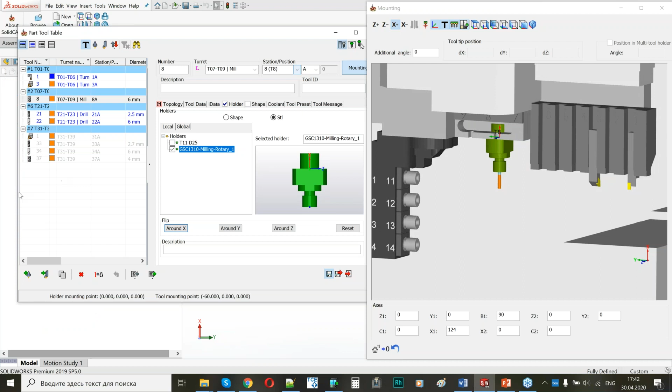Okay, I rename it. And now let's check the back spindle tools. This tool looks okay, but I will need to rotate the turning tool here. So I will choose it, and rotate it a little bit to choose some other direction, flip it around and pull it out. I will need a special holder here.

Also, what I would like to do is change a little bit my cutoff tool, because the previous one used a 12 millimeter thickness holder, but for this machine I need to use 16. Sorry, this isn't about the insert, it's about the tool holder. So I should change my shank.

It will be okay, it will be 16 millimeters, and I should position it accordingly. Okay, and oh, it looks good, 16, and maybe here I would like 16 too. Nice, so this is steel tool number 1, the cutoff tool.

Also, I would like to calculate all the operations. Okay, and now I will add some extra MCO cycles here to have the possibility to cut with the drilling tools on the back spindle. I need to position my stock first. I have a special cycle to position the stock.

It's called before applying the G620 axis pattern. And for this MCO, I will have to decide the position of the stock for the drilling operation. I have this position here, and I would like to change it and apply it like 20 millimeters.

So the stock goes out from the guide bush, and then this tool goes to the stock, and the stock is not moving, only the back spindle with these tools moving to perform this drilling operation. It's a very nice feature, very nice operation. It is used for deep drilling.

Also, sorry, I will need to change to move the stock back after this operation, and I will add one more machine control operation, and I will move my stock back to the collet. Okay, and what else should I do?

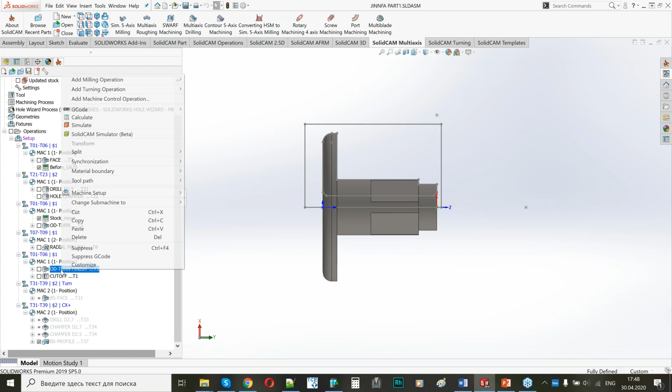Now I will calculate the operations again, and now I would like to add MCO cycles for the part transfer. Part transfer is going to be performed after they finish the turning cut, and here I will use MCO operations again. I will have my first MCO, which is called Z1 positioning for cutoff, and again here I will need to choose my cutoff tool.

It will be tool number 1 again. And again, as in the previous setup, I will pick the point of the cutoff position of the tool, and I will add some 1 millimeter here. Okay, now we can check it.

And the next operation will be synchronization of Z-axis. It's a must. And this is my cutoff operation.

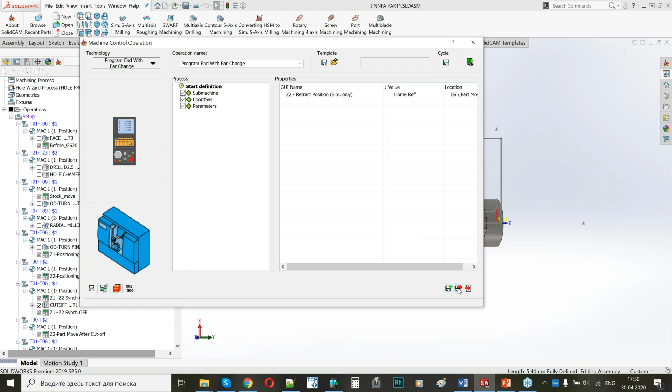After it, I will add the synchronization off command, and again some couple of MCO cycles to retract my back spindle, move after cutoff for the back spindle, and program end with bar change on the main spindle. This will be the end of the main spindle program.

Now I will unsuppress the operations for the back spindle. We'll calculate them. And my last operation, again, will be the ejection - part eject.

Before I will go to simulation, I would like to check my synchronization first. And for this machine, the interesting thing is that it uses what is called axis patterns. It's a special G commands, G600, and for the machine it means a little bit more than just a simple G code, because using just one of these commands, a machine knows how many axes it can use in this set of operations.

For example, during the part transfer, it knows the zero position for the back spindle and where to even move back spindle after this operation. So it's a special Citizen type of programming.

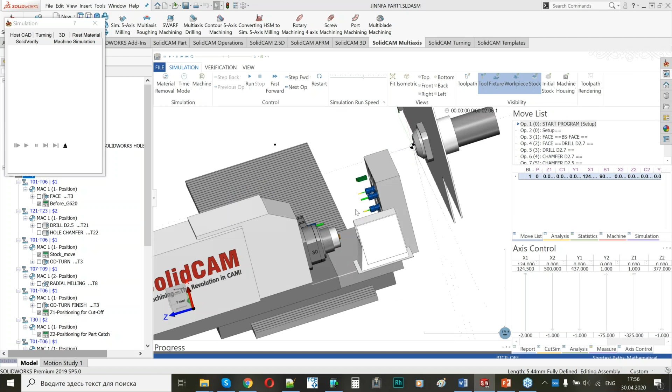All I need to know is the specific of the machine. So now I have 2 parts. I can see my part on the back spindle, and I can start the process.

So I have both operations here, and my main spindle is waiting. Let me show you this process again. I would like to see it again. So this is what is happening. Let me show you again what I have here.

So my part is positioned out from the collet, and with G620 axis button, my back spindle goes to the part, and it knows that I'm going to use these tools. It's a special axis button for these tools on the back spindle. And here I can see the process - I perform drilling and chamfering. That's what's going on the machine.

Then I lead out the tools, because I know that I will need my back spindle during the part transfer, and I retracted it with the retraction distance. I can make it further - for example, I made 100 millimeters. So let me continue with this. It's turning operation, and then we will have milling operation.

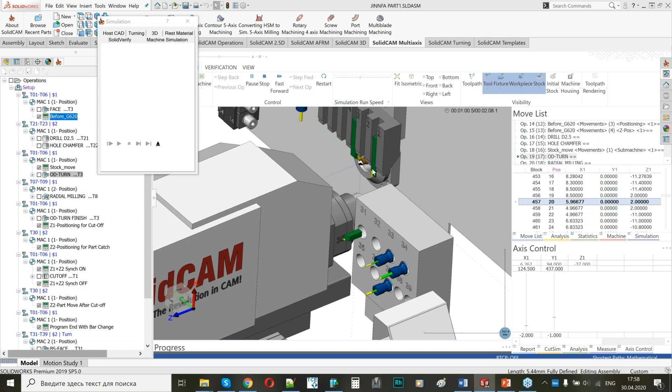This is our milling operation, no changes, and this is the finish operation. I will take a break here, and I would like to see my cutoff operation.

So this is what is happening. I called the cutoff tool. I position my spindle. This is the safety position, and this is the position of the clamp. And I can do my cutoff here. That's all.

I can also show separately what's going on the back spindle. For example, it is nice to check my polar movement for the back spindle here. What I have here: my part rotated with the C-axis, and the tool holder didn't move in the Y-axis.

And for example, the profile: I also have a possibility to choose the side of the cut, for example from X plus or X minus. Also, we have this possibility. For this purpose, all you need to do is just change the submachine on the tree. You don't need to recalculate the project.

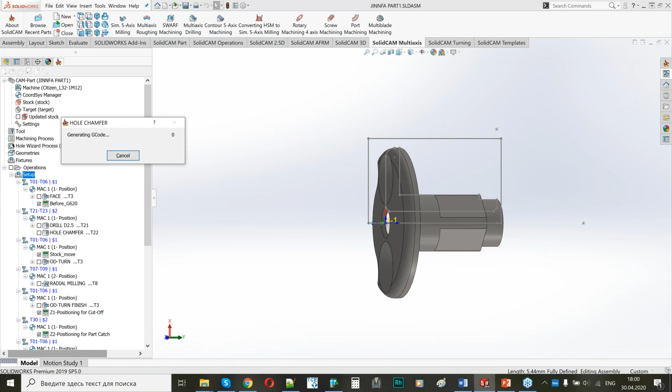Okay, this is my program. First of all, I have only one program for 2 channels, only one file. Inside this file, the separation is performed with these signs. It's a special sign for Mitsubishi CNC. And at the very end, I have one more block: a list of parameters for the machine, which is loaded on the machine, and the machine knows about these parameters before it will start to operate.

To show you this program in a more convenient way, I would say, I will save it here, and I will try to open it in some other software.

So here I have a special software to check the Citizen programs. This is what is called an access button, and this is an additional wait mark for this type of program. Citizen has 2 types of wait marks: first is the access button, and the second is a normal Mitsubishi wait mark like this one.

So this is the beginning of the program. This is our face operation, and then I have my back spindle operations, everything I would like to get on the back spindle, and after that I will have my drilling operation. I prepare my stock for the movement, and then I have the drilling operations here, with the back spindle, a special access button, and then I continue with operations on the main spindle, and then I call the tool for the cutoff again, synchronize.